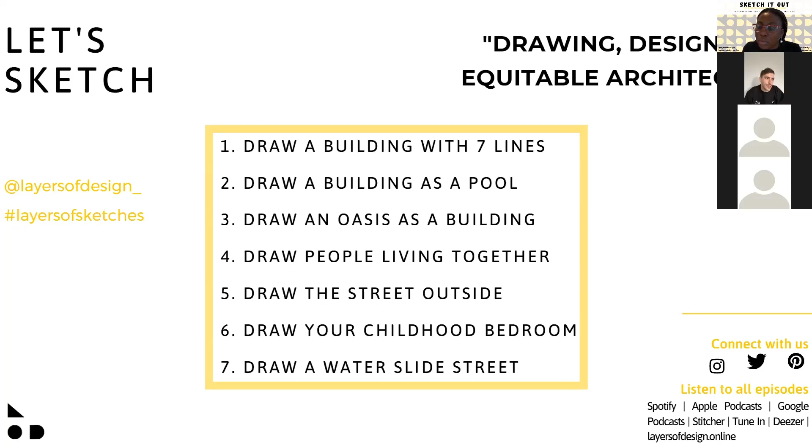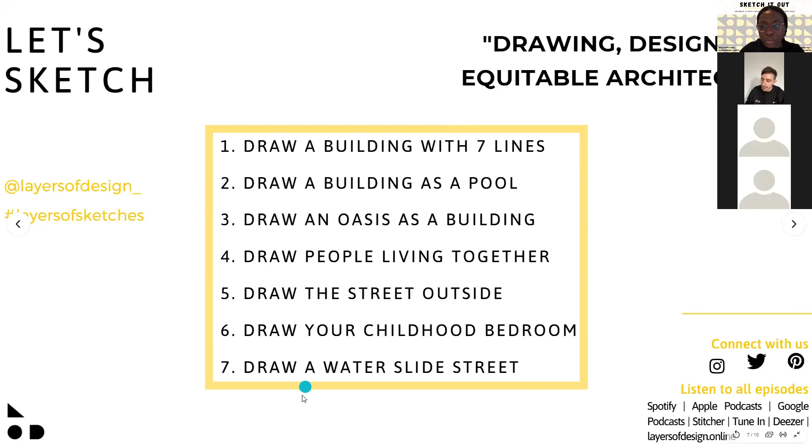So we did our final project for that class about race and architecture, and looked at the history of resistance and activism within architecture schools, especially from '69 onward, beginning with the civil rights movements in the 50s and 60s. We wrote a few essays and put together a timeline looking at cultural events, governmental events, architecture events and publications happening at the same time, to suss out the history of how politics impacted architectural development, because we hadn't found many resources discussing that actively.

In addition, we conducted a series of off-the-record interviews with young architects who had just recently published books. Some of their work had something to do with politics loosely, but many were just doing formal work not explicitly related to politics. We asked them about the politics of their work, what that meant for them, what their connection was to that world. For the most part, people said, oh, we don't really think about that, it's not something that concerns us.

And it's funny now—Trump gets elected, everything happens over the past 4 years, and those same people, even if their practices haven't necessarily become more political, I don't think we'd hear the same answers now as we did at that time. Now they wouldn't say it's not something I think about, doesn't matter in my work. So I think that's definitely a shift for our whole discipline.

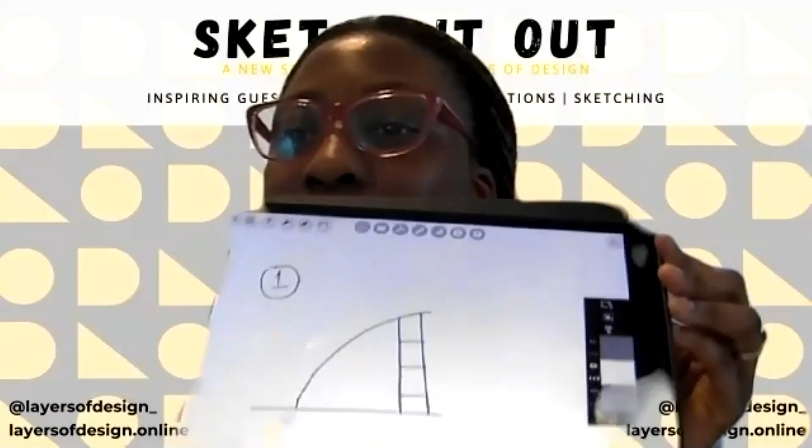Then I was like, okay, maybe I could get more creative with that one. So this is what I did for the second building. And then the third one, number four, was about drawing people living together. It's an elevation I did in COVID times, about the distance. Okay, so those were my four. Does anyone in the audience want to share theirs?

I want to see a pool building if anyone's done that. That's what I'm trying to sketch right now.

Oh, hi, Samita. Oh, you're on mute. Yes, 1 second.

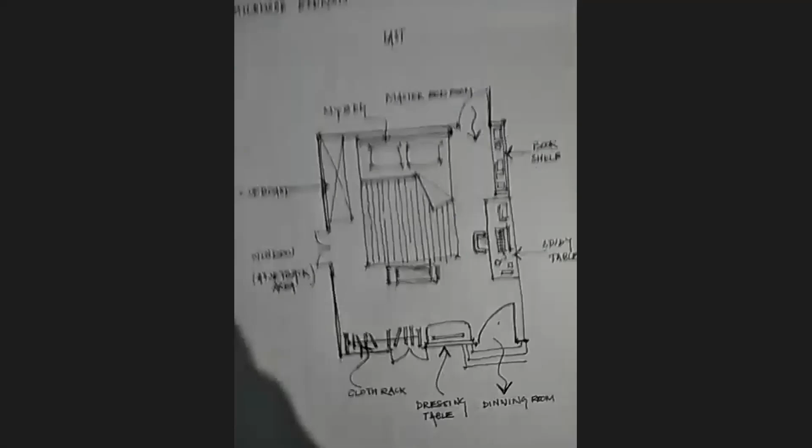Can you see my sketch? That's my sketch, it's my childhood room. Here's my bed, and that is my master bedroom, my mother's room. This is my room, and there's a dining room over here. And there's a setback area which has window opening from the side.

Very nice, I love how detailed you got with the labels and everything. Thank you so much. It looks like a room.

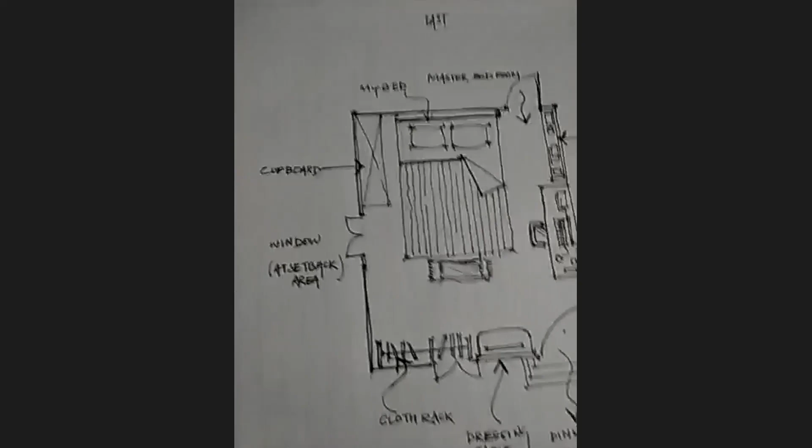So I'm an architect, I have done architecture. And then I have done masters in landscape architecture. And now I'm practicing, I think I have 3.5 years of experience. I have not practiced core architecture, but I have been practicing landscape architecture for 3.5 years.

Wow, very nice, and do you enjoy landscape architecture? I love designing, whether it's jewelry designing, building designing, or landscape design. So I love designing, basically.

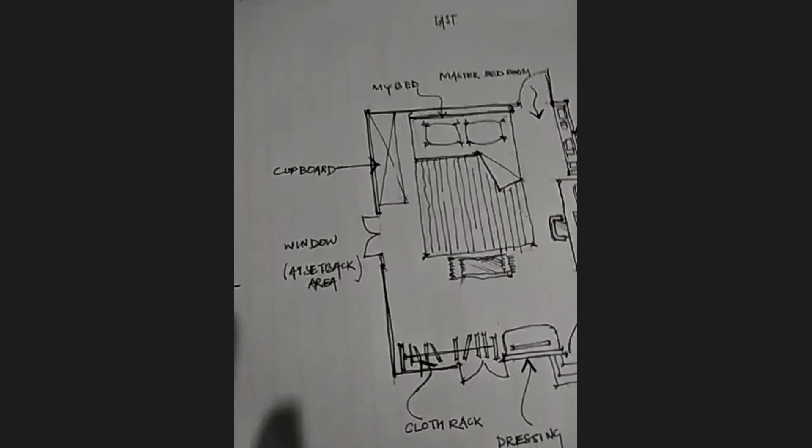Very nice, thank you for sharing, and thank you for being a part of this session today. Thank you so much, I'm sure.

I love seeing that, yes.

Terry, Terry is an amazing sketcher. That's why I'm like, Terry. I'm commuting, so I didn't sketch today. No problem, but thank you for next time. Thank you for joining.

Yeah, Terry's sketches are gorgeous. She was on a few episodes back, and what was our topic again? I think educating the young professionals or something. Nice, and the building she chose was actually pretty hard, it was the Ribbon Chapel. Oh, that building is cool. Yeah, it's super cool, it was a challenge to sketch, but I had a lot of fun doing that.

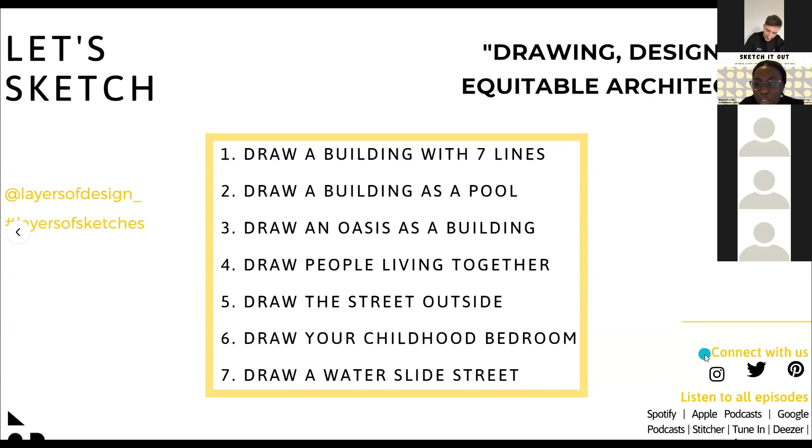Okay, well, do you have your sketch to show us? I have, I'm trying to do something, I don't know what's happening here. No problem, in the meantime we can start taking questions. Sure, here's my building as a pool that I'm starting to work on.

Nice, oh that's interesting, I couldn't figure out how to do that. There's just things in the pool. Yeah, I'm not sure if this is it, but it's something. And then this is my building with 7 lines. Oh cool, okay. I see what you did there with that one line. Crazy.

Okay, so if anyone has questions... oh, I think you're muted. Oh, sorry about that. Okay, let me see if any questions have come in. If not, that's fine.